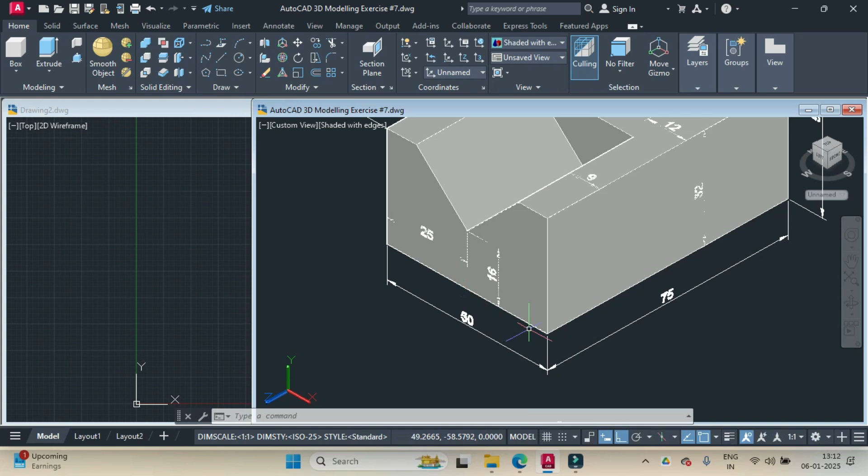After analyzing this drawing, I feel the best starting point would be drawing this base rectangle of 75 units by 50 units, then extruding it by 32 units, then drawing this wedge and using the press pull feature of AutoCAD, pushing it inside and creating a gap of 25 units.

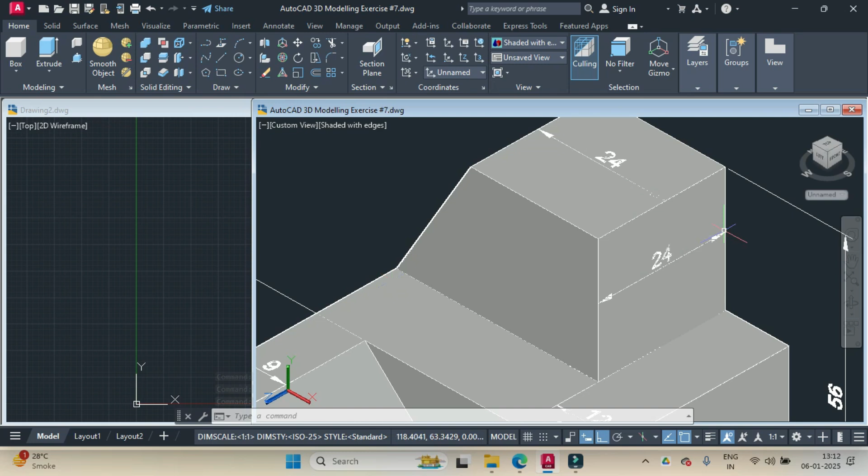Then creating this extrusion on the top. The length of this line should be 50 minus 12. Then the height should be 56 minus 32. Then this width is 24 and join the start with the end and extrude it to a distance of 24 units. Then select both entities and using the union command, join it.

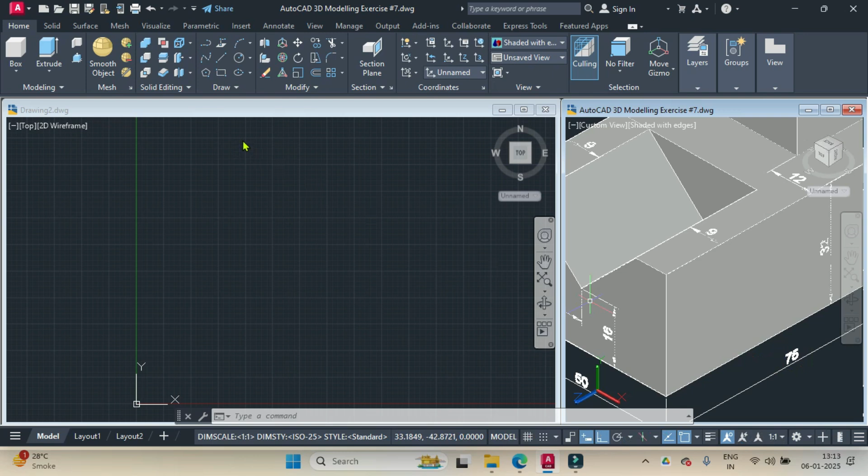So let me show you how we'll proceed with the drafting. We'll create a new drawing and first begin by drawing a rectangle of 50 units and 75 units. We come into our drawing, use the rectangle command, click in the top left corner, select 75 units, press tab, 50 units, and hit enter. So our base rectangle is now ready.

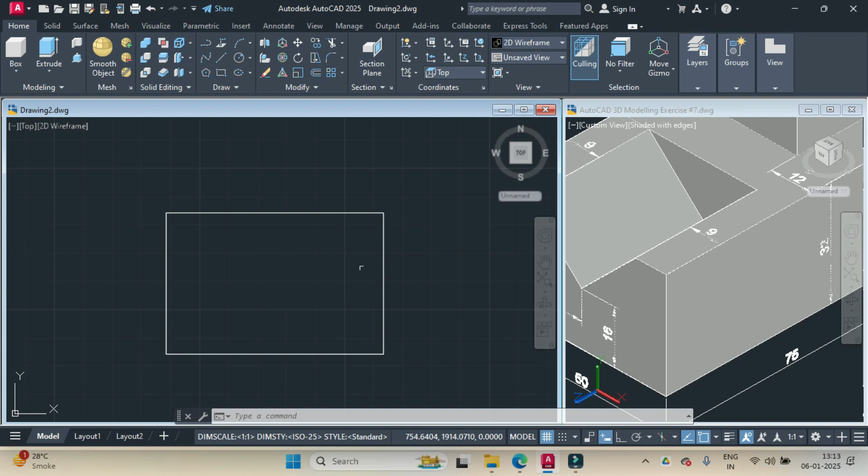Now we want to see this in the southwest isometric view. We click on this home tab and we are now in the southwest isometric view. Now we want to extrude this to a thickness of 32 units.

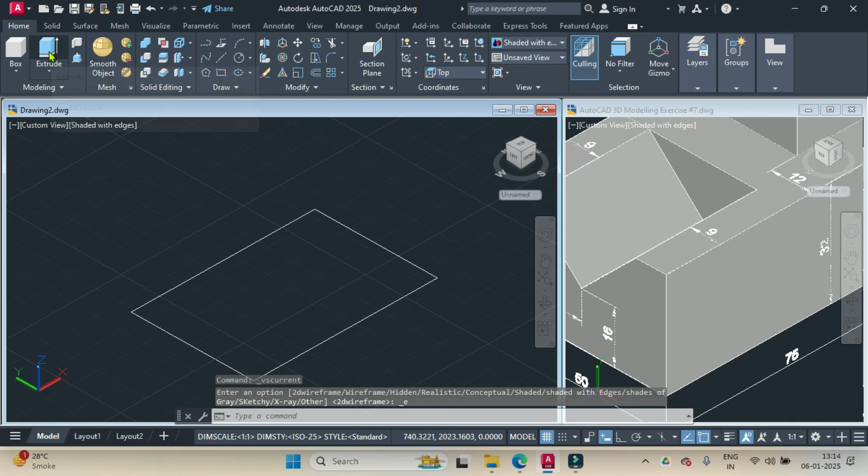We click on this 2D wireframe first and change it to shaded with edges. Then we click on the extrude command, click on the object to extrude, press enter, and give the thickness as 32 units and press enter. So we get our extruded rectangle of 32 units.

Now the next thing we want to do is create this wedge. The entire length of the wedge is 50 units, and this side is 9, and this side is 9. So 50 minus 18 is 32, so this distance is 32 units.

So we'll click in our drawing and first change the view to the left view, left profile view. We click on coordinates and select left view. You can see the grid has changed to the left view.

Now we use the line command and also turn ortho on, click anywhere in the drawing board, give a distance of 32 units, and press enter. Again enter to end the command.

Now as you know, if you see this drawing, the extrusion is 32 units and this is 16 units, so this should also be 16 units. So we type the line command.

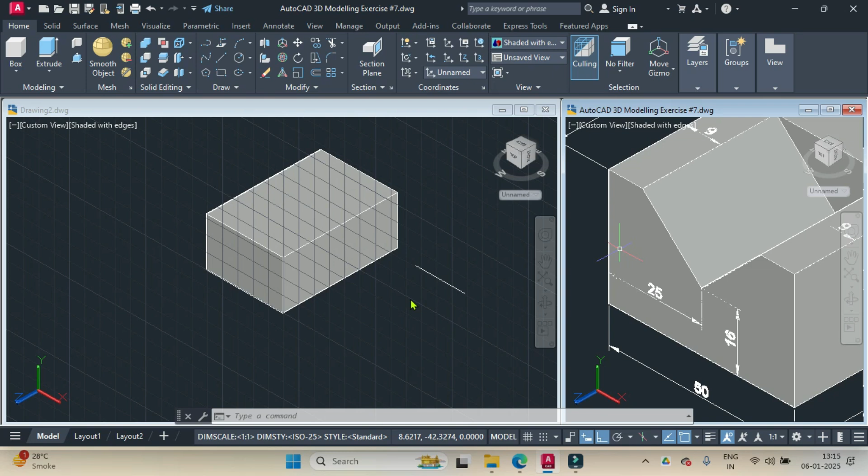We come into the drawing board, type the line command, click on, type mid and click over here, then extend it downwards 16 units and hit enter. And then join it with this line, hit enter.

And another line we'll draw. We'll select the end point of this line and join it with the end point of this line. And our profile is ready.

We no longer need the referential line, so we select it and delete it. Then we select our geometry and using the join command, make it into one surface.

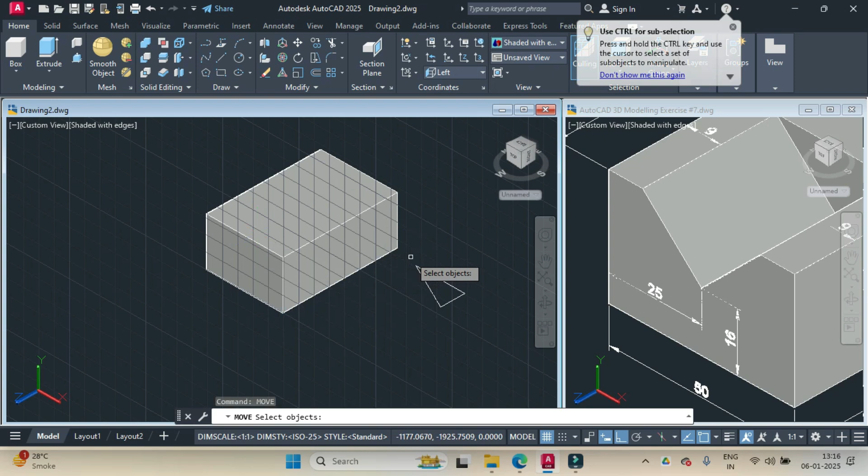Now we want to move this over here. So we type move, press enter, then click on our object, press enter. Base point, I want the midpoint of this. And where you want to move it, again I'll say midpoint.

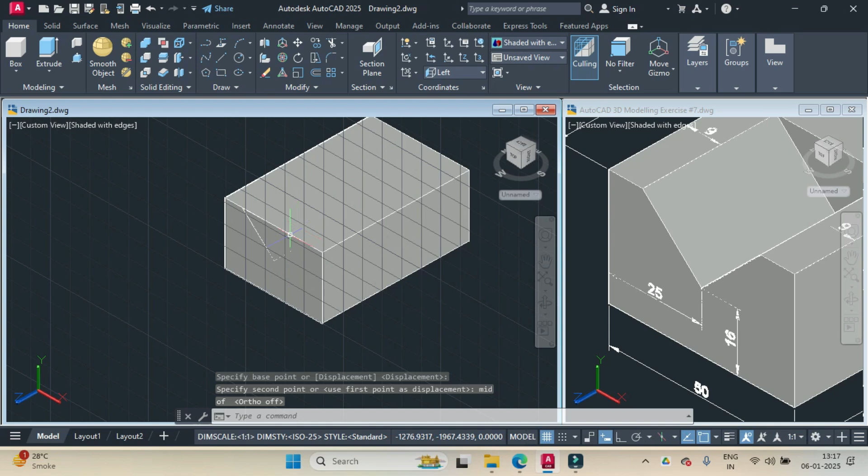I'll turn the ortho off and click over here. So now our profile has come in the left view.

Now using the press pull feature of AutoCAD, I would like to pull it inside to a distance of 36 units. So I come into the drawing, use the press pull feature, click on this face and press it inside 36 units, press enter, and our wedge gets cut to a distance of 36 units.

Then I press the escape key and the profile has left a small view. So select that old view and press delete to get rid of that old profile view.

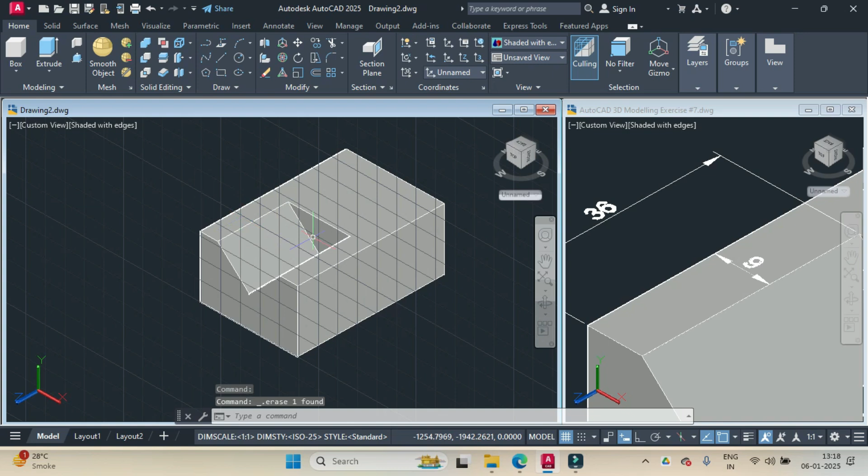Now we have to create this upper geometry. First we'll calculate the distance of this line. This whole is 50 and from that we want to minus 12, so we want to create a line of 38 units, by 24 units, and height also 24 units.

So we come into our drawing and anywhere outside we use the line command, turn ortho on, and draw a line of 38 units, press enter, upward 24 units, enter, left 24 units, enter, and join with the end point of this line and press enter. Now we select this entire entity and using the join command we make it into one shape.

Now we want to move this shape to the upper right corner of our rectangle. So we type move. What do you want to move? This shape, enter. Where is the base point? I select end point over here. And where do you want to move it? I'll select end point of this rectangle over here.

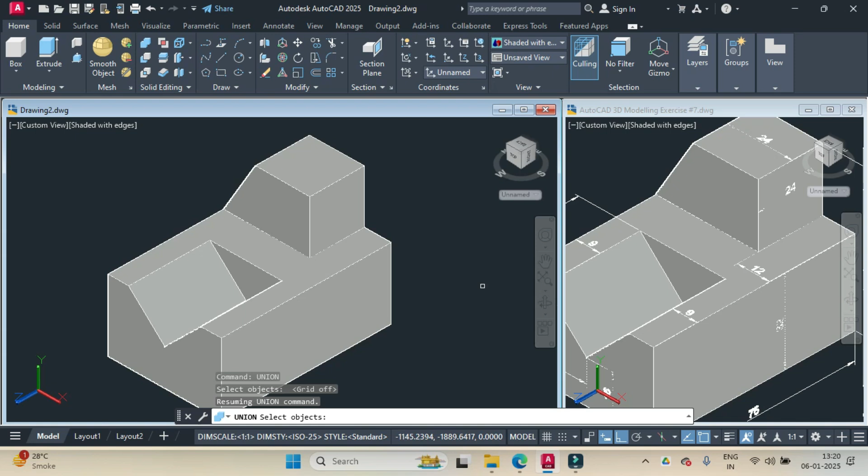Then you can turn the grid off by pressing F7 and take a closer view of your geometry. Also, you can use the orbit command and orbit to see your geometry in all possible views.

So friends, in this tutorial, we have seen how to make this beautiful geometry in AutoCAD. Hope you have learned something new.